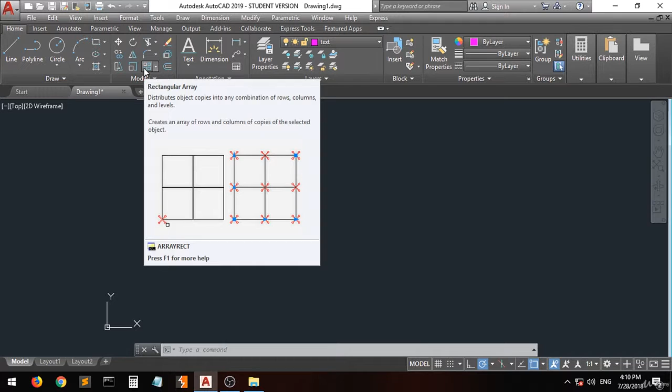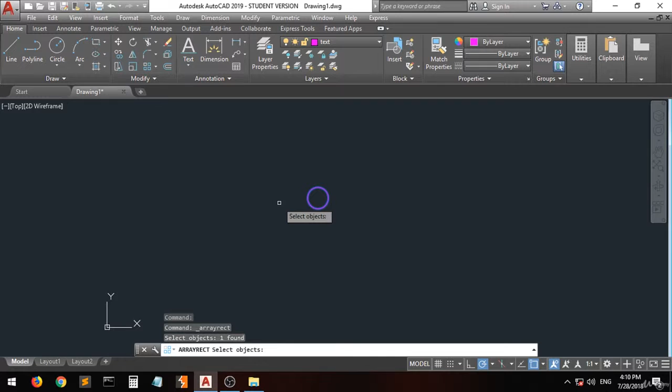Let's, for example, assume that we have this circle here and you want to create an array for this drawing or this circle in a rectangular way. So you go to this command. As you can see, they tell you to select an object that you want to make an array for. Right click or enter. And as you can see, the array has been created.

You can modify and change the properties of this array, whether from these arrows, these points and joints over here, or from this palette that has appeared to you. As you can see, we have four columns: one, two, three, four, and we have three rows: one, two, and three. Now you can change it, for example, to three, click enter.

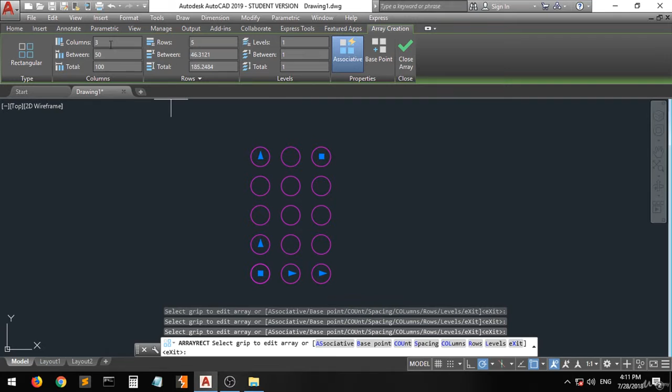You can change this to five, click enter. Zoom out. Now, as you can see, we have three columns and we have five rows. You can change the spacing between the columns. You can, for example, make it 50. Enter. See. Make it, for example, 100. Enter. See. Now let's change this spacing, for example, to 80. Enter.

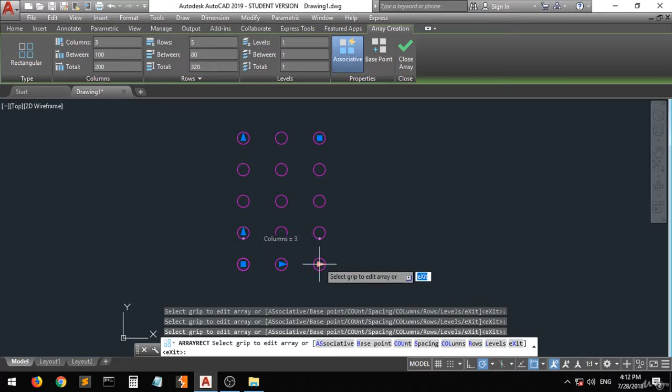You can change the properties of the array from here or from these arrows. You can increase the number of columns by clicking on this and then moving it right or left. And then you can change the spacing between these columns from this one here. Click on it. See, the spacing will increase, or you can decrease it.

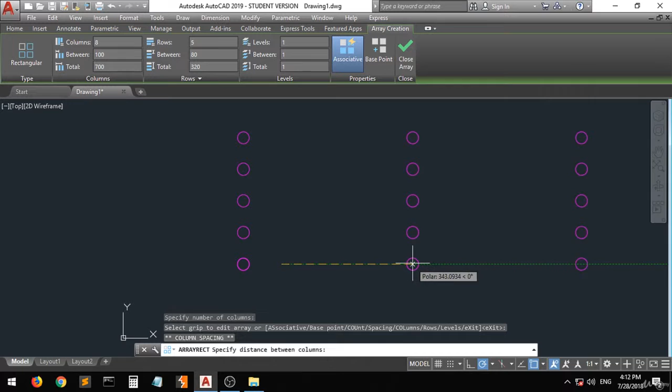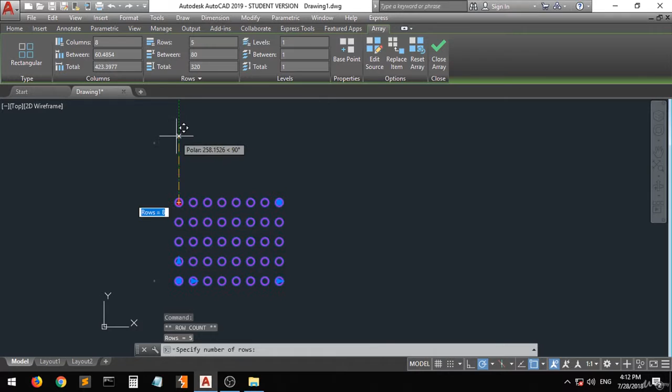Okay? And the number of rows, you can increase the number of rows by clicking on this and zoom out. Okay, zoom out just here. Activate it again. See, from this arrow, click here, and then you can change the spacing between the rows from this one. Click on it.

This will increase the spacing. This will decrease the spacing. Then you can press escape, and the properties will be closed. And this is how you create a rectangular array.